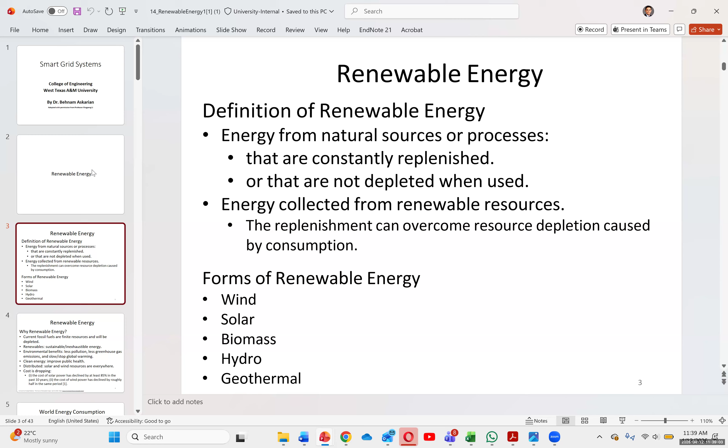So why do we care so much about renewable energy? First, fossil fuels are limited, so they won't last forever. Second, renewable energies are cleaner, so they help reduce pollution and greenhouse emissions. That's better for the environment and also better for public health.

Another big reason is cost. Over the years, solar and wind especially have become much cheaper, so renewable energy is no longer just an environmental choice. It also makes economic sense as well.

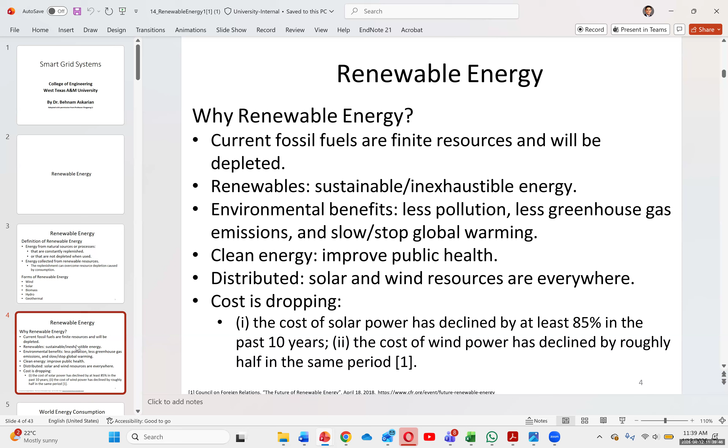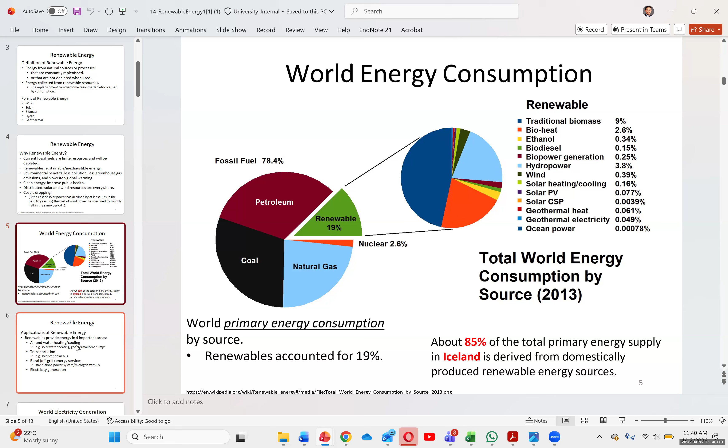This slide gives us the big picture globally. Fossil fuels still make up most of the world's energy use, but renewables are an important and growing share. Also notice that renewable energy is not just one thing. It includes hydro, wind, solar, biomass, geothermal, and more. Some countries like Iceland rely a lot more on renewables because of the natural resources they have available. Specifically, they have a lot of geothermal.

Now, renewable energy is used in a lot more places than just electricity generation. It can be used, for example, for heating and cooling, transportation, off-grid systems, and of course regular electric power generation. So when we're talking about renewables, we're talking about a broad energy solution, not just solar panels on rooftops.

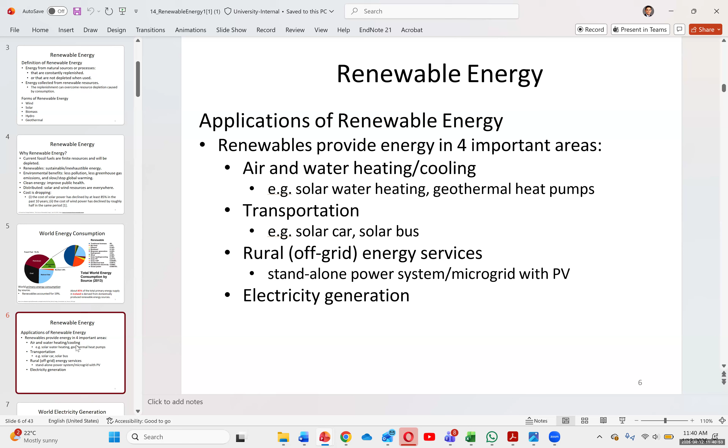Now, this slide shows energy use in the US by sector and also shows how electricity has become more important over time. A larger share of our total energy use now comes through electricity than it did decades ago. That means if we make electricity cleaner, we can make a lot of the whole energy system cleaner too.

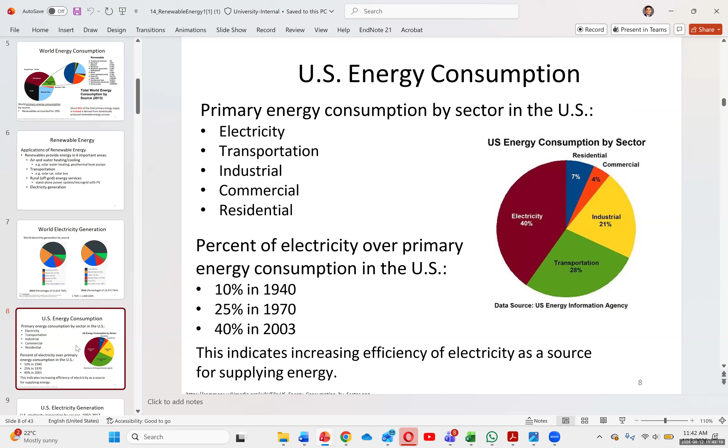So you can see it was 10% in the 40s, 25% in the 70s, and 40% in recent decades, and it's going up—the percentage of electricity over primary energy consumption.

This is a more updated view, and you can clearly see some major trends. Coal, as you can see, has dropped significantly since 2001. It went from around 2 billion megawatt hours to less than 0.8 billion. So as mentioned, coal has gone down a lot.

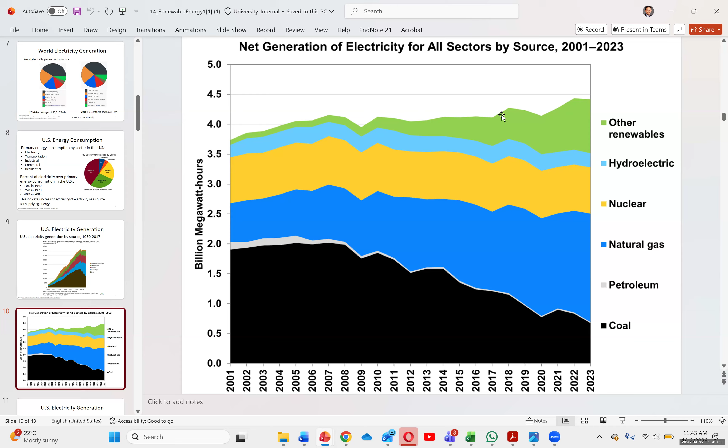Natural gas has grown because of fracking and the shale revolution, and now the U.S. is a net exporter of gas. It actually produces a lot of natural gas. It's much cleaner and cheaper than coal. You can also see that renewables have increased—hydro and other renewables have increased significantly over the past two decades. So when people talk about the energy transition, this is what they mean: the power system is shifting over time toward different resources.

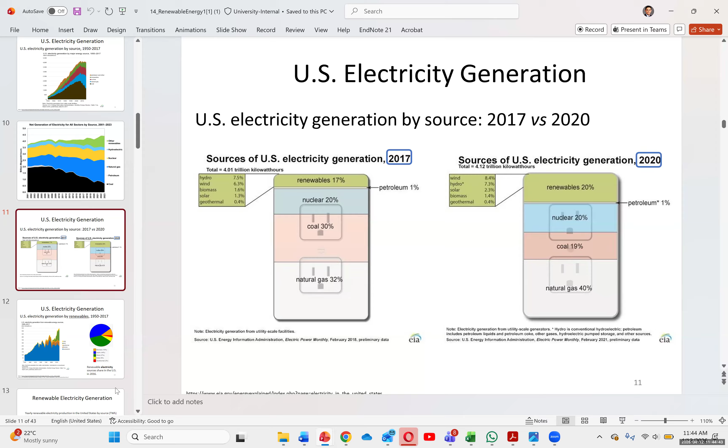This shows U.S. electricity generation from 2017 to 2020, just two time frames three years apart, and you can see how it has changed. Renewables went from 17 to 20%. Nuclear didn't change. Coal went down from 30% to just 19%, and natural gas went up from 32 to 40%. This comparison is nice because it shows how quickly things can change in just a few years. Natural gas increased, coal went down, and renewables kept growing. So the electric grid really is evolving pretty fast, and that's one reason why smart grid technologies are so important. You can see, just in a three year span, how it has shifted significantly.

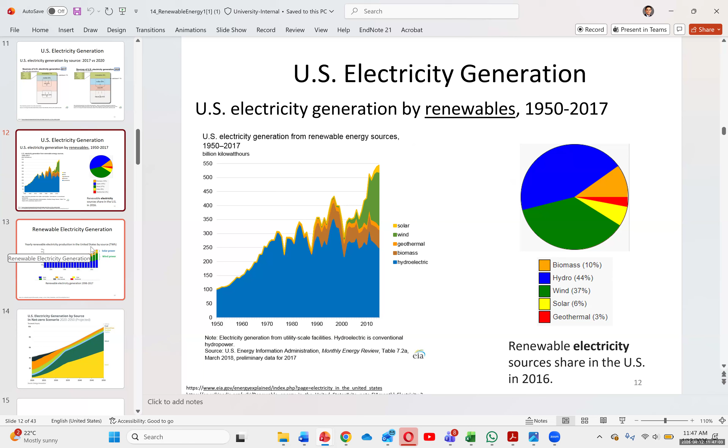Actually, they're tearing down a lot of dams. The reason is environmental impact - some of them have a huge environmental impact, so they're tearing them down. They prevent fish migration and so on, and have a huge impact on the ecosystem. So that's the reason we reached the peak of hydro energy - around the mid-70s and 80s we reached a peak, because we had built all the dams that we could on the rivers and water systems.

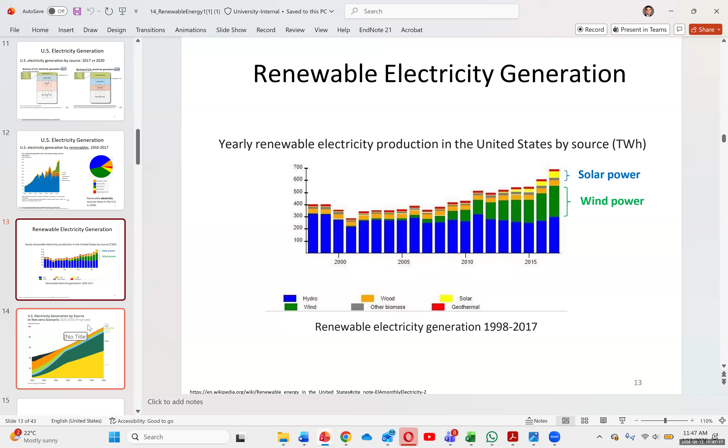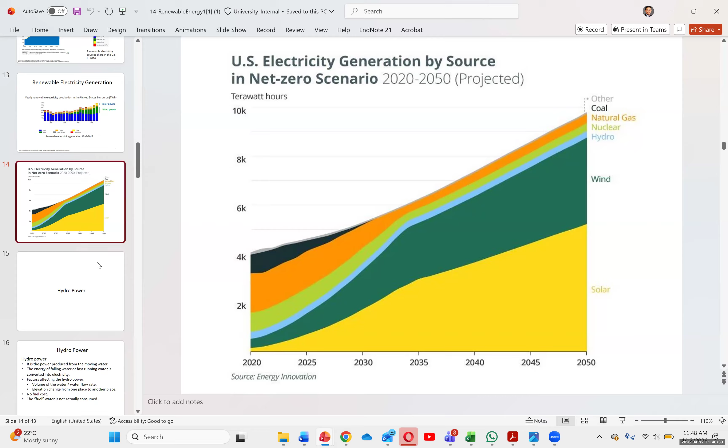Hydro and nuclear are so important because they help with reliability and stability. Again, wind doesn't always blow and the sun doesn't always shine, so we have a little limitation, especially in peak hours. The good thing about nuclear power plants is they run 24/7 around the clock, and we never shut them down, so it's very good for stability of the grid. And also hydro as well - you can open a dam anytime that you have a power need, and it's good for the stability of the grid. So the future grid will probably have a lot more renewables, but it will still need resources that can support the system. We're going to have a mix of systems, and in addition to that, a lot of storage systems like batteries and hydro storage and so on.

Now let's move into hydropower. This is one of the oldest renewable energy technologies, and honestly one of the most useful in power systems because it can generate electricity, and in many cases it responds very quickly. So it's very easy to open a dam and quickly compensate for the drop in generation from other sources.

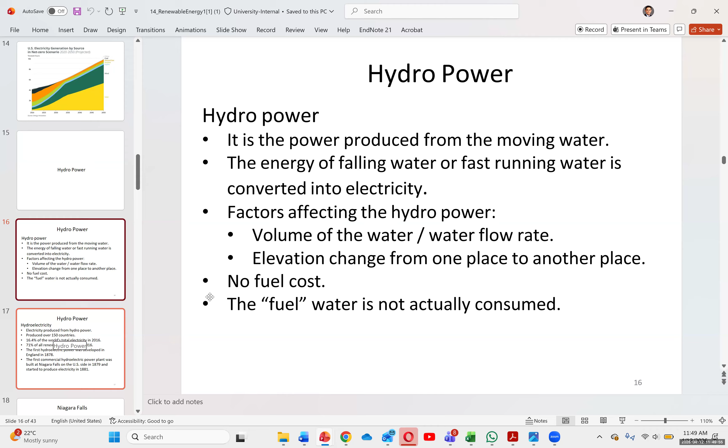Now, hydropower is just power generated from moving water, as you know. The way it works: water at a higher elevation has potential energy, gravitational potential, and when it moves downward, the energy can be converted into mechanical energy, and then using a turbine connected to a shaft or a generator, it will be converted to electrical energy. The two main things that matter are how much water is flowing and how much height difference there is - that height difference is what we call the head, the water head. Again, you can read faster than I can, so I just gave you a broad explanation. And obviously, because it's renewable, you have no fuel costs, and the fuel - water - is not actually consumed, you just use the energy of it.

It's one of the classic examples of hydropower. It's a natural location with a huge amount of flowing water and elevation difference, which makes it excellent for generating electricity. It's also historically important in the development of hydroelectric power. One of the first hydroelectric plants was actually created here.

There are different kinds of hydropower systems. We have hydroelectric dams, run-of-river systems, pumped storage, small hydro, micro hydro, and even tidal power. They all use water, but they differ in terms of scale, storage, flexibility, and where they can be installed.

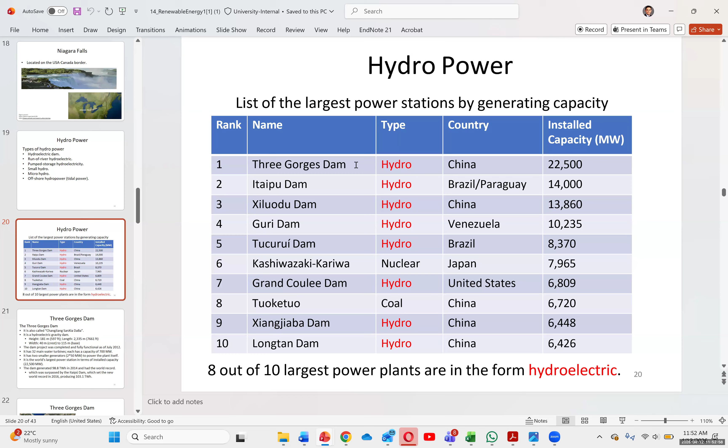Actually, when the Three Gorges Dam was built and the reservoir was fully filled up, they said it had an effect on the Earth's rotational speed. It's that big that it's actually creating a lot of environmental problems as well.

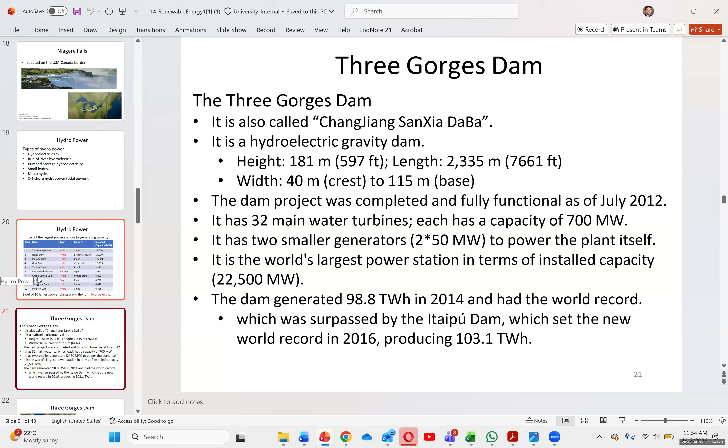It's the world's largest power station in terms of installed capacity. The dam generated 98.8 terawatt hours in 2014 and held the world record, which was surpassed by the Itaipu Dam, which set the new world record in 2016, producing 103.1 terawatt hours.

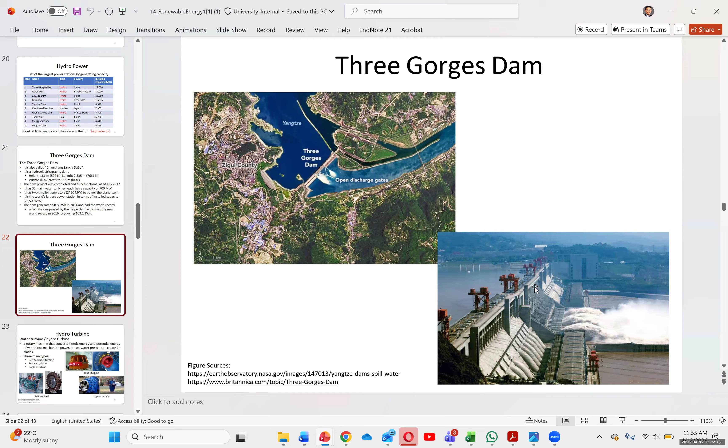Now, at the center of hydro generation is the turbine. Water flows through or onto the turbine. The turbine spins, and that mechanical motion drives the generator.

Sometimes they are for micro hydropower, some are for larger dams, and some are specifically designed for different water speeds and water heads. So for different applications, we have different designs.

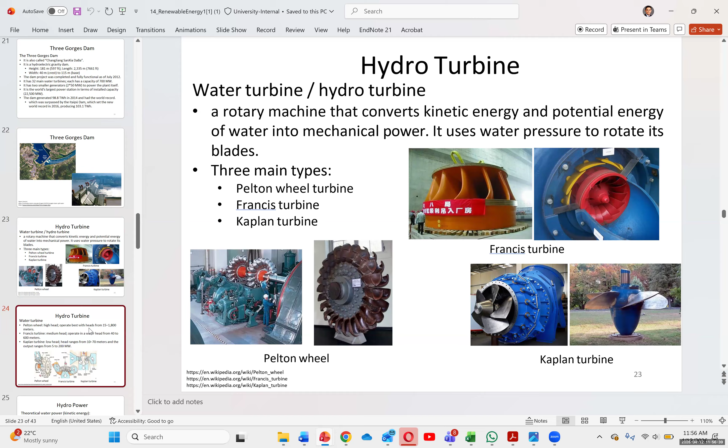Now, these turbines are used under different conditions. As mentioned, Pelton is typically for high head systems. Francis is for medium head, and Kaplan is for low head. These are usually for micro dams and inline river systems.

And Kaplan, as mentioned, is for low head but high flow systems. So engineers choose the turbine type based on the site and water conditions.

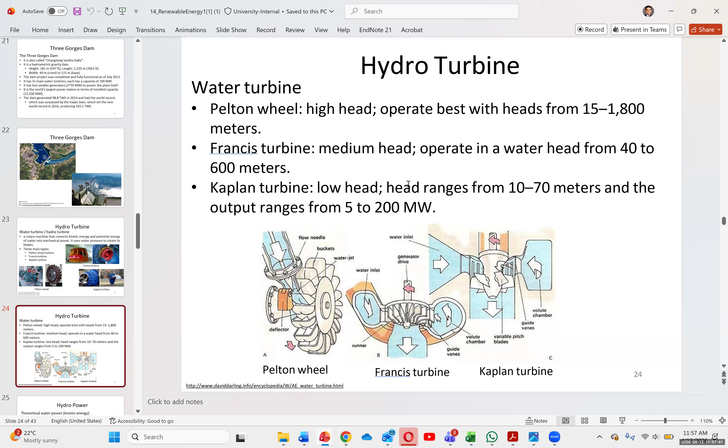You can see that Pelton usually operates best with heads from 15 to 1800 meters. Francis turbines are medium head, operating in waters with head from 40 to 600 meters, and Kaplan turbines are low head systems, with head ranges from 10 to 70 meters, and output ranges from 5 to 200 megawatts. So they're small and micro scale.

Now, this is the basic hydropower equation. The theoretical power depends on water density and also flow rate, gravity, and head. So in simple terms, more water flow and more height difference mean more power. Then in real life, we multiply by efficiency because the system is never perfect.

Rho is the water density, as mentioned, 1,000 kilograms per cubic meter. Q is the water flow rate, measured in cubic meters per second. And G is the acceleration of gravity, which is 9.8 meters per square second.

Again, these two are fixed. H is the falling height or hydraulic head. Head is the height difference between the inlet surface and the outlet surface. So the only things we have control of are the falling height of the system and the amount of water that is passing.

Now, as mentioned, the power captured by the water turbine isn't 100% efficient, so therefore we measure it in efficiency, where eta is the water turbine efficiency itself.

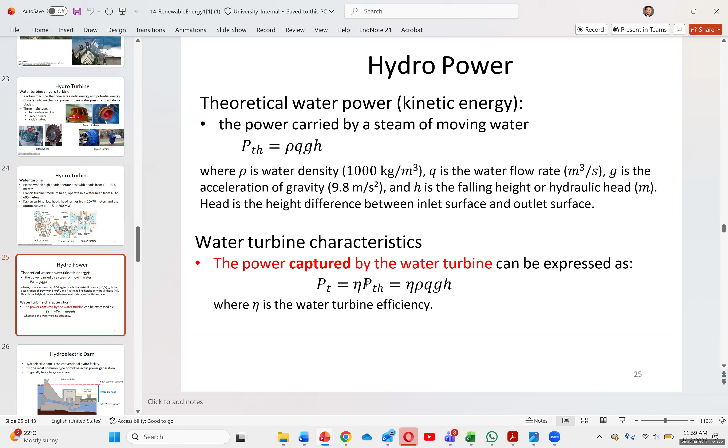Now, this is the standard hydroelectric dam setup. Water is stored in the reservoir, and flow through the intake and penstock spins the turbine. So we have the intake.

Usually you have a filter or mesh system to prevent debris and garbage from going into the penstock and into the turbine blades. The turbine is connected to a generator through a shaft, which produces electricity. The reservoir is important because it gives us some control over when and how the water is released.

Usually we have a valve that we can control how much water and when it's released. Now, the difference between the outlet and the inlet in height is called the hydraulic head.

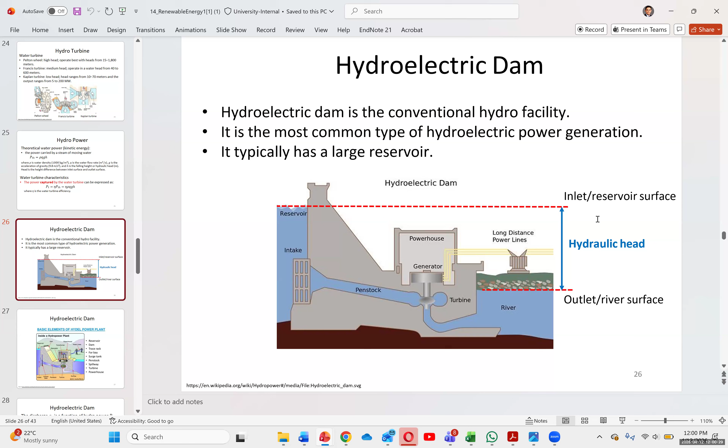This figure shows the main pieces of a hydro plant in more detail. When I explain the slide, I usually walk through the whole process of the reservoir, intake, the penstock, the turbine itself, the generator, the transformer. Obviously you need to step up voltage, then step down the current to reduce your losses, and the power lines out to the grid.

This is a very good overall picture of the system, and you can see the different parts mentioned here as well.

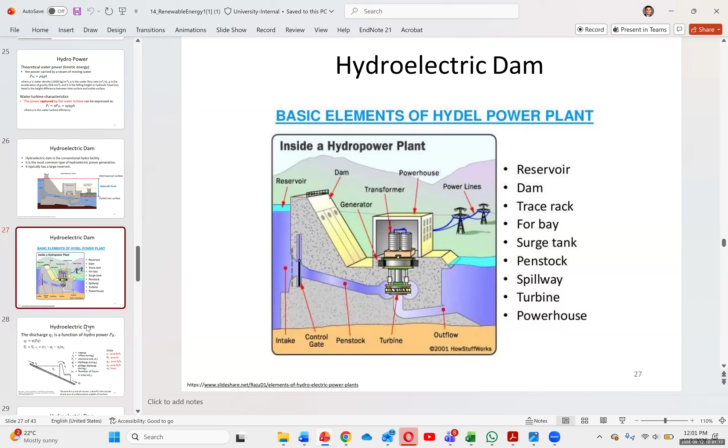One benefit, or one of the applications we use hydroelectric dams for, is controlling floods. Some dams are just for controlling floods and used as a reservoir, not even used for power generation. A lot of dams are used for water and soil management to prevent soil erosion and floods, and also for drought seasons to store water, but they are not even used to generate electricity.

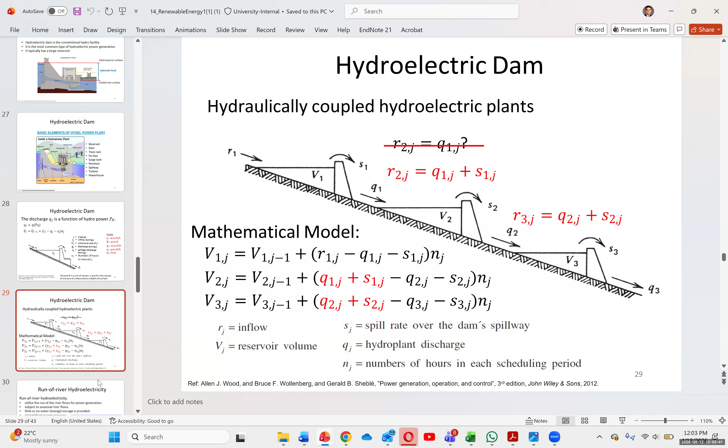Now another type of hydropower is run-of-river hydroelectricity. Run-of-river systems don't have much storage. They mainly use the natural river flow as it comes, so they depend a lot on seasonal water conditions. In spring, when the snow melts, you're gonna have a lot of water, and in fall, depending on the area, you're gonna have less. They can be simpler and sometimes have less environmental impact than large dams, but they are also less flexible and produce less energy.

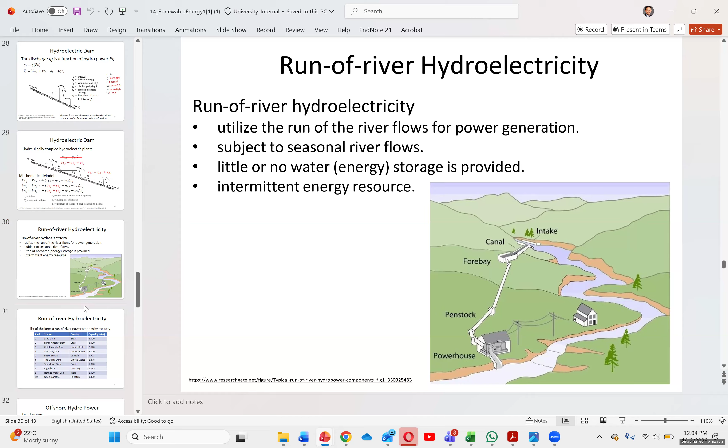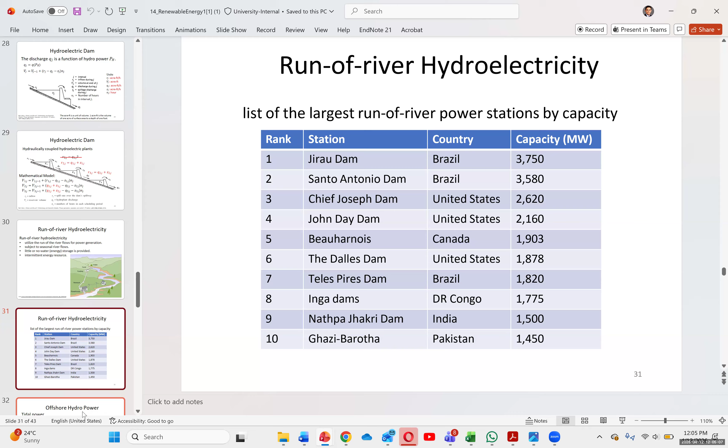Now another type of hydropower system is offshore hydropower, or tidal power as we call it. Tidal power uses the movement of ocean tides to generate electricity. One nice thing about tides is that they are more predictable than wind or solar—you're always gonna have them, you don't care about a drought or rainy season.

But the challenge is that tidal systems can be expensive, and there are fewer suitable locations, so they are not as widely used. They are also susceptible to corrosion because you usually have seawater, salty water, so the blades must be made out of special material. They need more maintenance, and so on.

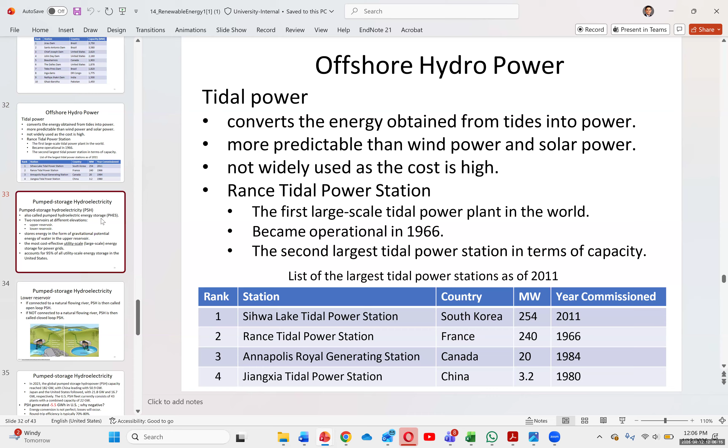Now another type of hydropower system is pumped storage hydroelectricity, which has gained a lot of traction in recent years because of the rise of renewable energy and the need for storage systems. These pumped storage systems are really important in modern power systems. Think of it like a giant water battery: when electricity is cheap or there's extra power on the grid, water is pumped uphill, and when electricity is needed later, the water is released back down to generate power.

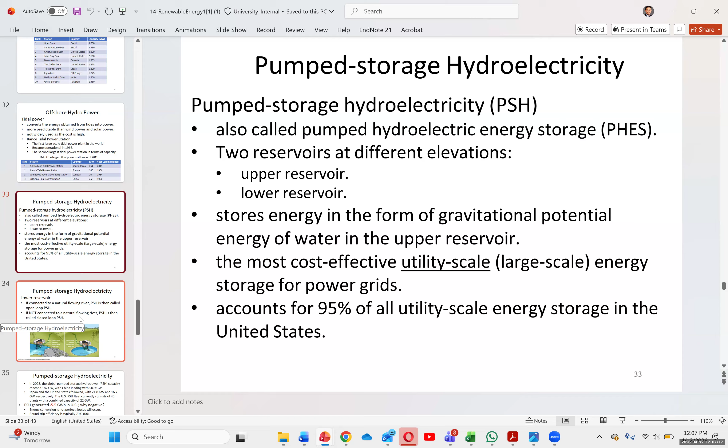These account for 95% of all utility scale energy storage systems in the US currently, because they can be built at large scale and much cheaper than lithium or chemical batteries. But you can't put them everywhere—you need two reservoirs, and they are very expensive to build in the first place.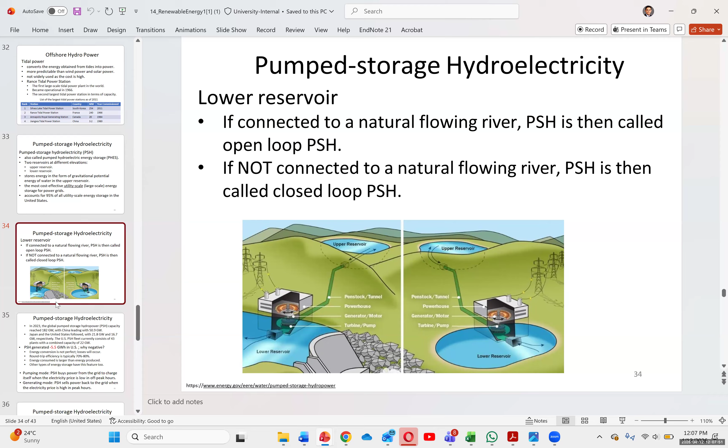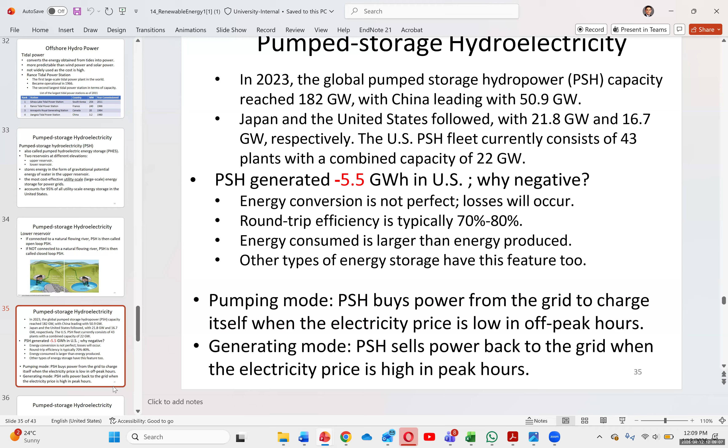Here are some numbers for hydropower. In 2023, the global pumped storage hydropower capacity was 182 gigawatts, with China leading at 50.9 gigawatts. Japan and the US followed with 21.8 and 16.7. The US PSH fleet currently consists of 43 plants with a combined capacity of 22 gigawatts. Again, you see the negative number because the efficiencies are typically around 70 to 80%, but it's still very valuable.

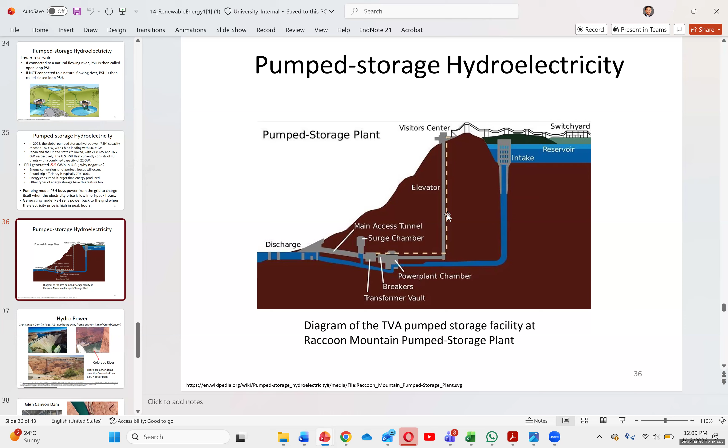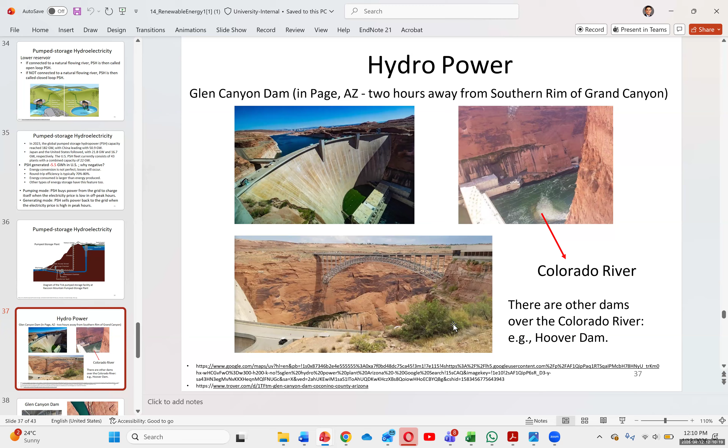Now this is the Glen Canyon Dam in Arizona on the Colorado River. It's another good real world example of major hydro infrastructure in the US. It also reminds us that rivers often have multiple dams, so hydro operation can affect a whole chain of facilities. You can see the Colorado River and different parts of the dam.

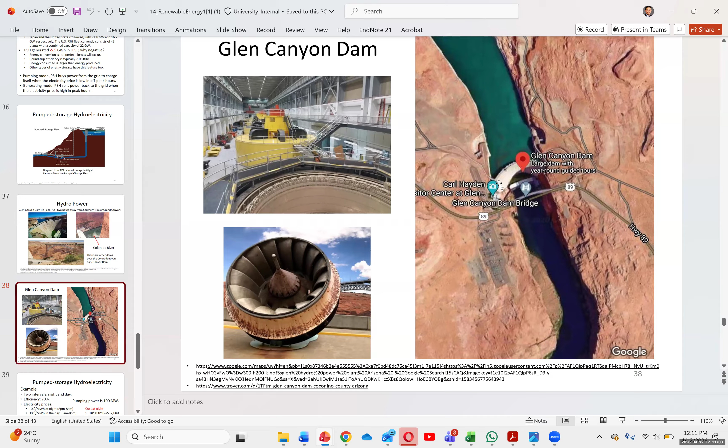We also have different types of dam systems. I'm not going to get into them, but depending on where you put them, if it's a rocky or sandy system, you're going to use a different type of dam.

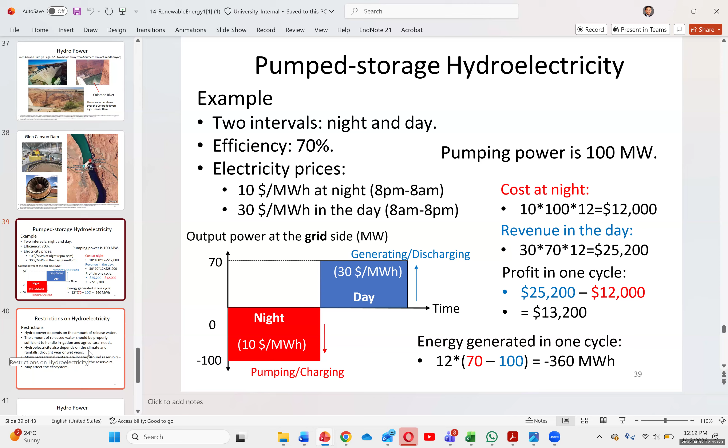Energy generated in one cycle is negative 360 megawatt hours, but still, because we're using this as storage and shifting energy, we still benefit in the system.

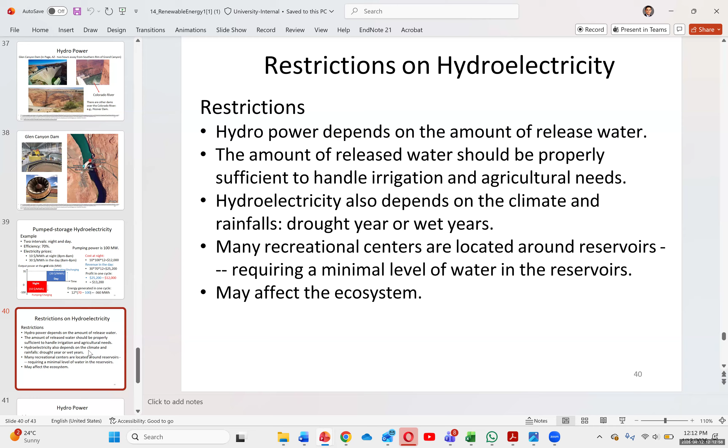One of the best things about hydro is flexibility. Hydro units can ramp up very fast, often much faster than thermal plants, sometimes taking just a couple of minutes. That makes them really useful for balancing the grid, handling sudden changes in demand, and supporting variable renewables like solar and wind.

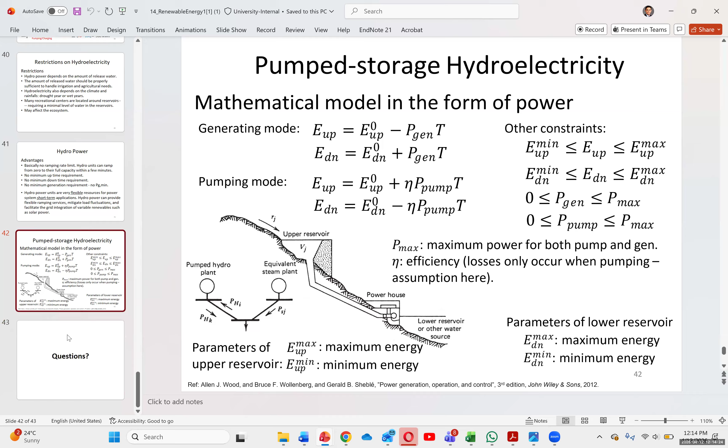So overall today we looked at renewable energy in general and then focused on hydropower. We talked about how hydro works, different types of hydro systems, turbine types, pumped storage, and some of the main pros and cons. If you have any questions, please email me.